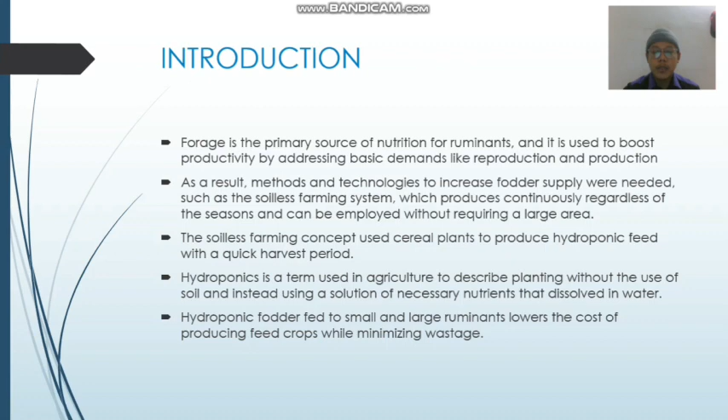Problem statement: the watering system for fodder in this project is used to enhance crop watering efficiency and make it easy for the user to control the crop's water schedule.

Referring to the conventional method, farmers or livestock breeders usually have difficulty monitoring the water cycle of their feeding crops. A farmer needs to ensure that the crops he grows always have a sufficient amount of water at the correct time of the day.

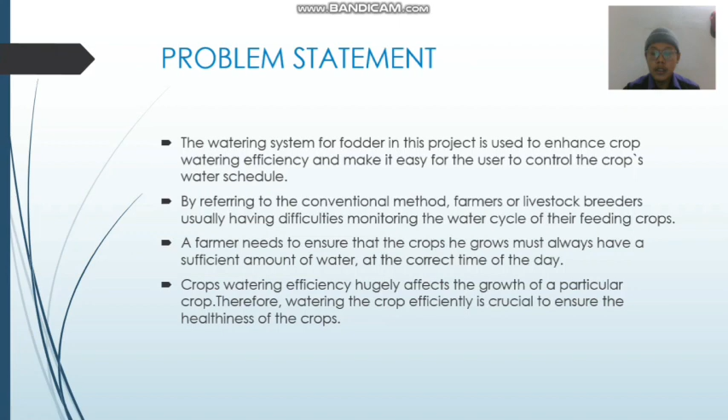Crop watering efficiency hugely affects the growth of a particular crop. Therefore, watering the crops efficiently is crucial to ensure the healthiness of the crops.

Research objectives: first, to improve the water monitoring system by using NodeMCU. Next, to enhance the water recirculation system quality and reduce water consumption.

Scope of research: designing the fodder system by considering all factors including the dimension of the fodder, the amount of grass produced by the fodder, and the time of grass growth. Estimation of water volume and time taken for the water to circulate the entire fodder system.

Choosing the suitable pump to circulate the water based on usage needed. Selection of microcontroller component required by the system. Designing an automatic water recirculation for the fodder system. Observation and analysis on the grass growth and time taken for the water flow.

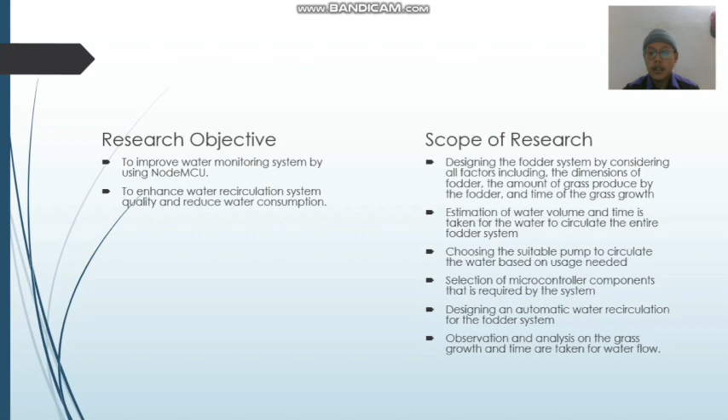Introduction of fodder: plants cultivated for animals are known as fodder crops. Fodder crops are divided into two categories, which are temporary and permanent. Permanent fodder crops are land that has been used for herbaceous forage crops for at least 5 years, whether cultivated or growing wild. A fodder system can feed a vast variety of livestock for milk and meat production.

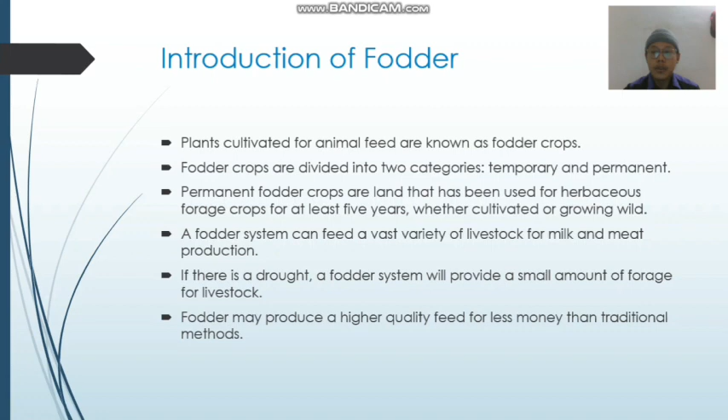If there is a drought, a fodder system will provide a small amount of forage for livestock. Fodder may produce high quality feed for less money than traditional methods.

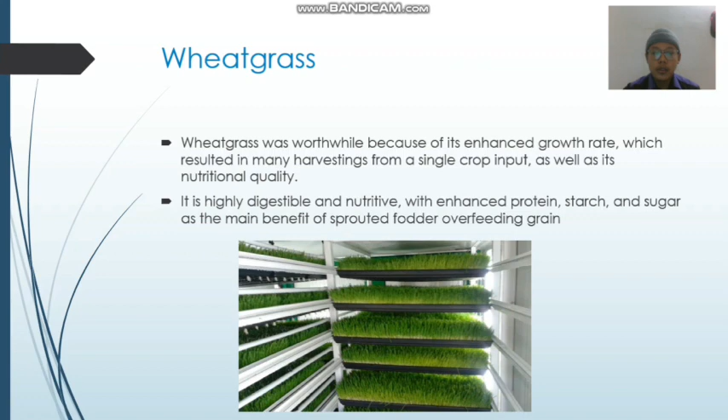Next, we explain about wheatgrass. Wheatgrass is worthwhile because of its enhanced growth rate, which results in many harvests from a single crop input, as well as its nutritional quality. It is highly digestible and nutritive with enhanced protein, starch and sugar as the main benefit of sprouted fodder over feeding grain.

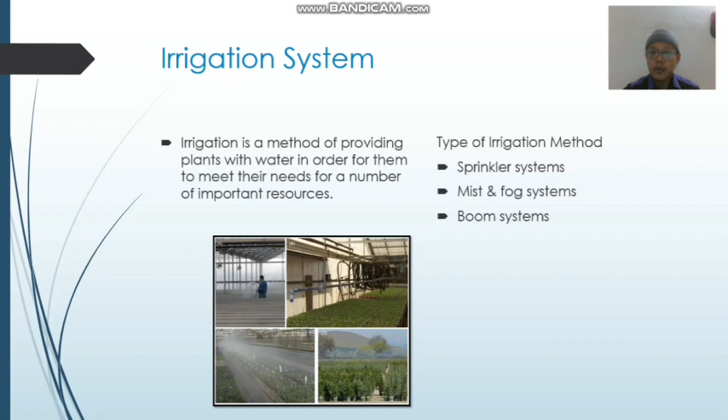Irrigation system: irrigation is a method of providing plants with water in order for them to meet their needs for a number of important resources. There are a few types of irrigation methods: the first one is the sprinkler system, next the mist and fog system, and the last one is the boom system.

Irrigation controlled by NodeMCU: the goal of this study is to create a low-cost hydroponic system that can keep the water level in the grow tray constant using a simple microcontroller control mechanism. Unlike a traditional hydroponic system, the pump does not need to run continually.

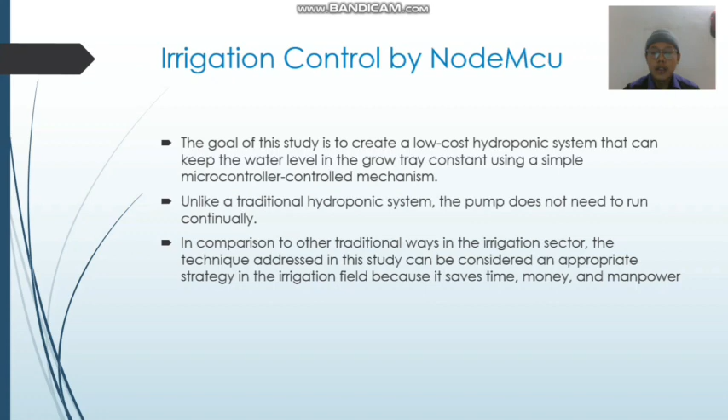In comparison to other traditional ways in the irrigation sector, the technique addressed in this study can be considered an appropriate strategy in the irrigation field because it saves time, money and manpower. Methodology: the goal of this project is to use a NodeMCU to maximize the use of water in the irrigation system process, as well as to construct an ecologically friendly feed system.

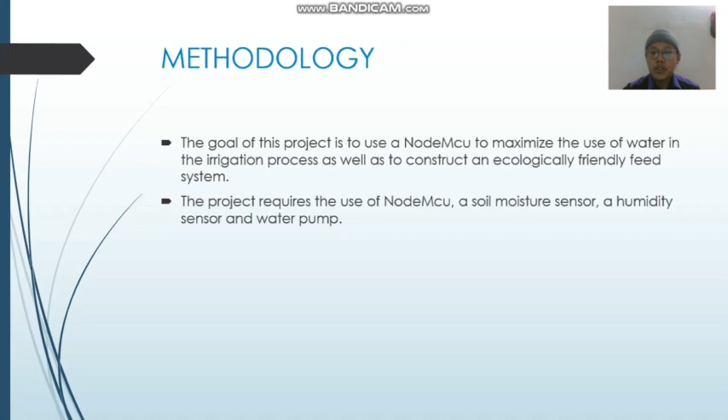The project required to use a NodeMCU, a soil moisture sensor and humidity sensor, and a water pump.

This is the flowchart of the project. First we start, then we identify the problem. After that, we develop the research objective. Next, we find the literature work that relates to the project. Next, we need to determine the parameters. After that, we design an irrigation system. After that, we test and analyze.

If the test and analysis does not meet the specification, we will try to design another concept again. If the test and analysis is proven, we move to discussion, documentation and report writing, and then that's all for the project.

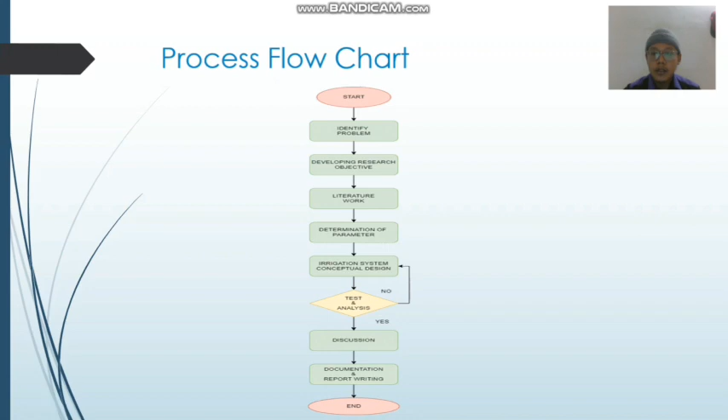Selection of controller. For the irrigation system, the selection of controller is crucial to ensure the working performance of the system is at its best.

An embedded system for program control of a water system is included in this suggested work. This project uses a remote sensor system to identify a water system design in real time. This design maintains a strategic distance from water wastage while providing a uniform and required level of water for the automation of the irrigation framework using IoT.

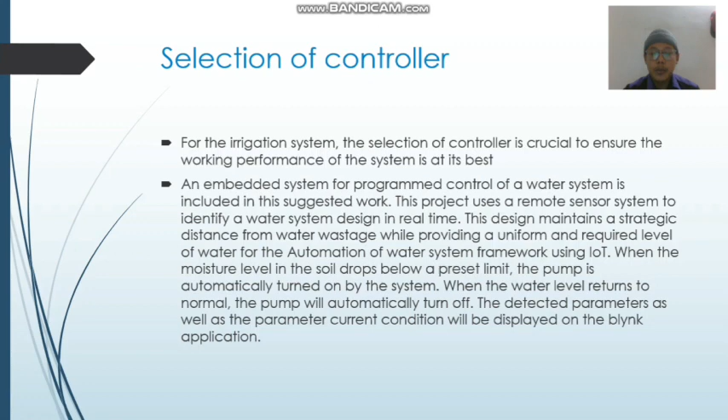When the moisture level in the soil drops below a preset limit, the pump is automatically turned on by the system, and when the water level returns to normal, the pump will automatically turn off based on the detected parameter. The current condition parameters will be displayed on the Blynk application.

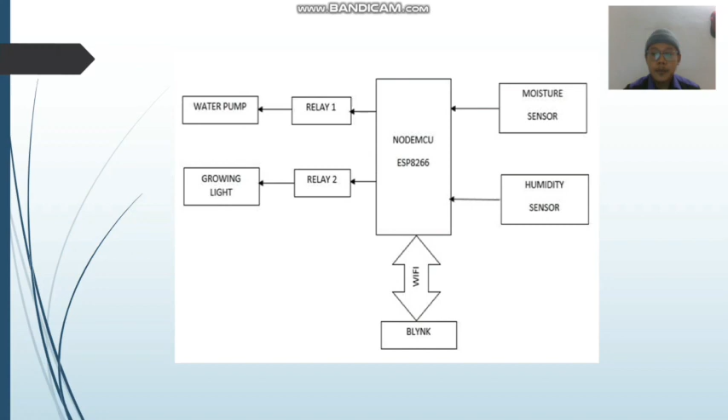This is the block diagram of the working principle, the NodeMCU working principle. The moisture and humidity sensor will send a signal to the NodeMCU, and then the NodeMCU will send another analog signal to the water pump and growing light. Then the user can monitor the process using the Blynk app.

Sensors. There are two sensors we use in this project. First, the soil moisture sensor measures the volumetric water content in soil. The sensor was utilized to detect the presence of moisture in the hydroponic plant in this project. The sensor will send a signal to the NodeMCU to switch on the water pump when it detects less moisture in the planting tray. The humidity sensor is the other sensor used in this experiment.

To reduce the frequency of watering, a temperature and humidity sensor is required. That is, as the weather gets cold, less water is required, and in the opposite case, more water is required.

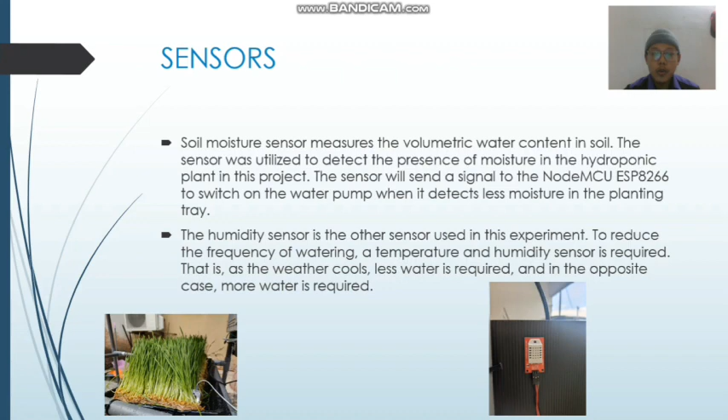On this project we will be using the Blynk app. Blynk is an IoT platform that allows users to build their own application to control and receive data from their project over the internet. When the NodeMCU has internet connection, it will display the data on the Blynk software, which allows users to track their hydroponic current condition.

This is the watering system layout. First, water will pump from the water reservoir and flow through the frame, as you can see in the diagram. Once the water reaches the top level of the frame, it will automatically recirculate into the reservoir tank due to the slope that we have there.

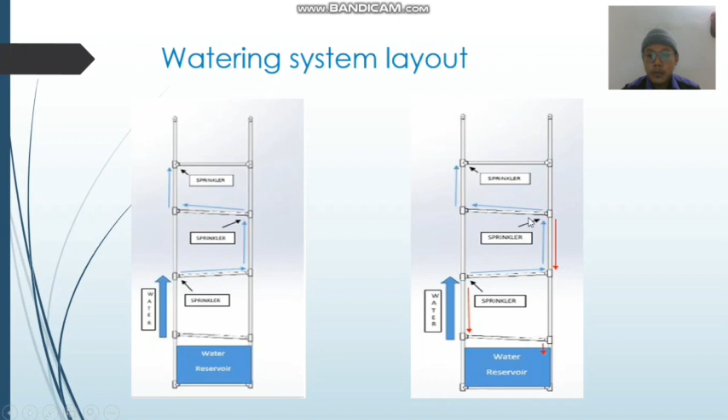So the water that drops from the sprinkler will drop into the tray and continue into the water reservoir.

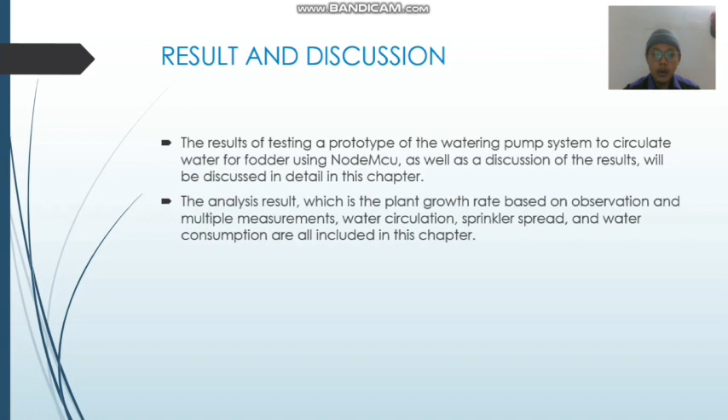Result and discussion. The result of testing a prototype of the watering pump system to circulate water for Fodder using NodeMCU, as well as a discussion of the result, will be discussed in detail in this chapter. The analysis result, which is the plant growth rate based on observation and multiple measurements of water circulation, sprinkler spread, and water consumption, are all included in this chapter.

Germinating process. First, the plant must go through the germination technique, in which seed is soaked with water for roughly 4 to 12 hours, and water is sprayed on the seed twice a day until the radicle is seen, before shifting the seed into the developing tray.

For this procedure, two sets of germination process have been conducted, which is the 4-hour and 12-hour immersion process, to compare the difference.

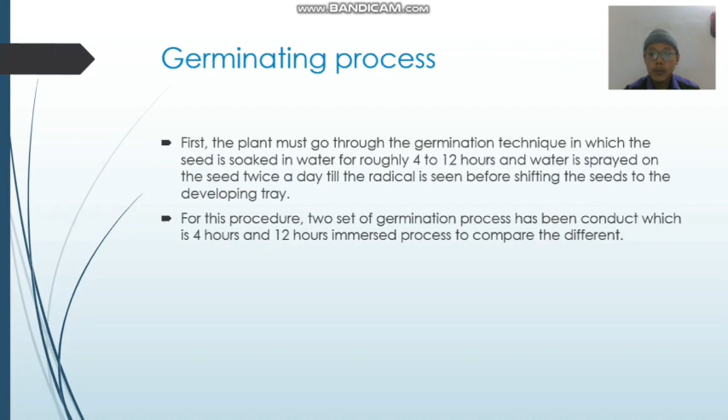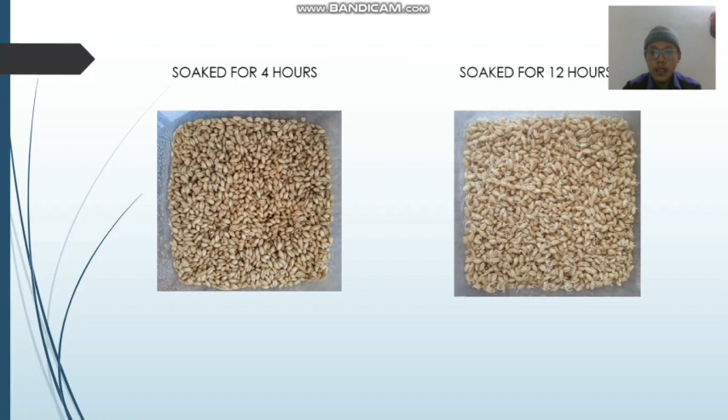This is the two trays of seed soaked for two different times. The first is soaked for 4 hours, and the second for 12 hours. Both seeds are shown on the second day of germination. As you can see, the seed soaked for 4 hours germinates slower than the seed soaked for 12 hours.

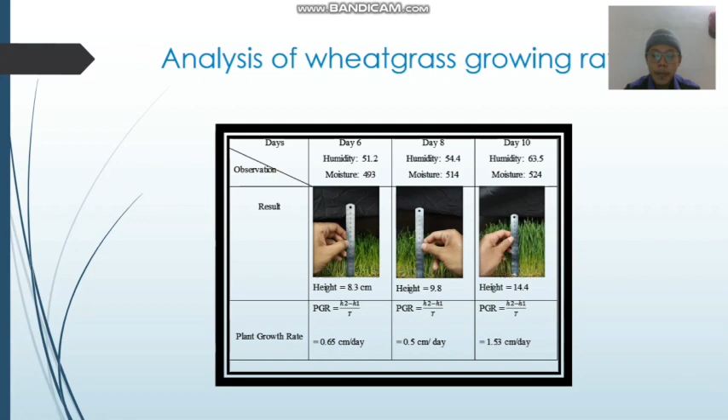We can also see the difference in humidity and moisture each day. The total plant growth rate for day 6 is 0.65 cm per day, for day 8 is 0.5 cm per day, and for day 10 is 1.53 cm per day.

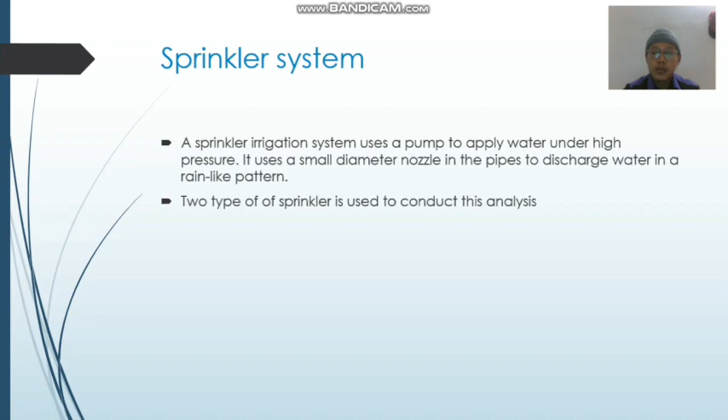Sprinkler system: a sprinkler irrigation system uses a pump to apply water under high pressure. It uses a small diameter nozzle in the pipe to discharge water in a rain-like pattern. There are 2 types of sprinklers used in this analysis.

The first is the fixed 360 sprinkler, and the second is the multi-stream sprinkler. The working pressure for both sprinklers is the same, 1.5 to 3 bar, but the nozzle diameter for the fixed 360 sprinkler is a little smaller than the multi-stream.

The spray radius is also different. The fixed 360 sprinkler has a 0.7 by 0.9 meter spray radius, while the multi-stream sprinkler can reach 0.8 by 1 meter. The connection size also differs: the fixed sprinkler is 3 mm and the multi-stream sprinkler is a bit bigger at 4 mm.

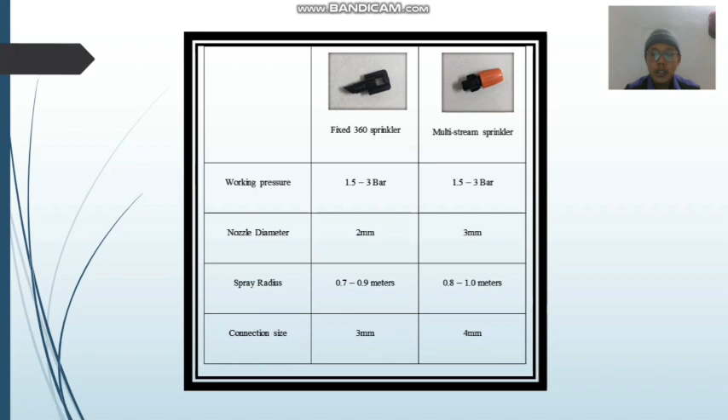The fixed 360 sprinkler has the ability to produce a very fine mist in a 360 degree direction. This output is suitable for fodder seed growing in the early phase. However, the 360 mist is not adjustable — it is fixed to give out mist around 360 degrees.

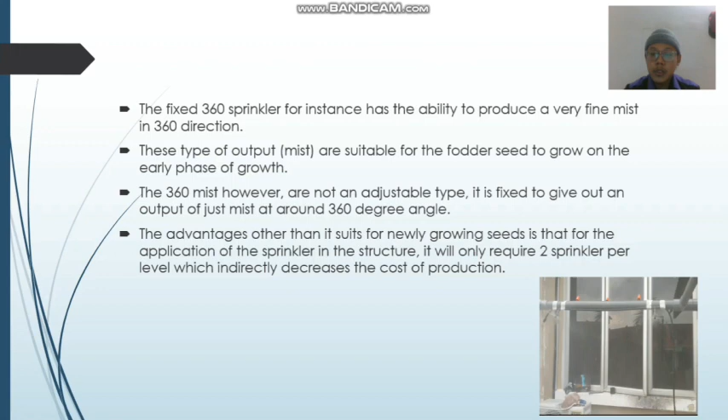Besides being suited for newly growing seed, another advantage is that applying this sprinkler in the structure only requires 2 sprinklers per level, which indirectly decreases the cost of production.

The actuator of the multi-stream sprinkler can control the spray radius according to certain conditions required by the user. Its bold advantage is that it can be set up not only for misting but also adjusted to drip water.

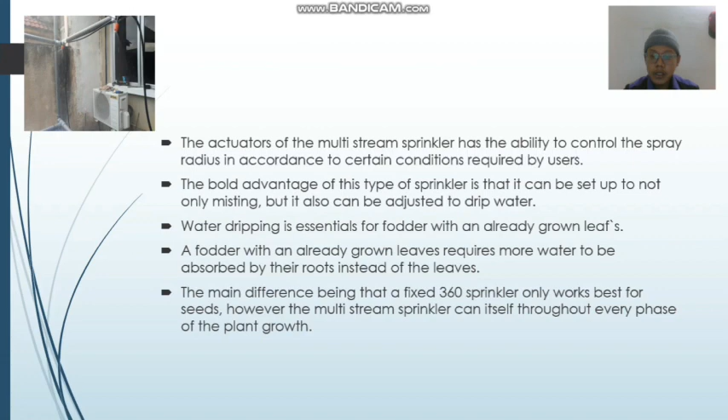Water dripping is essential for fodder with already grown leaves, since it requires more water to be absorbed by the root instead of the leaf. The main difference is that the fixed 360 sprinkler only works best for seeds, while the multi-stream sprinkler can serve every phase of plant growth.

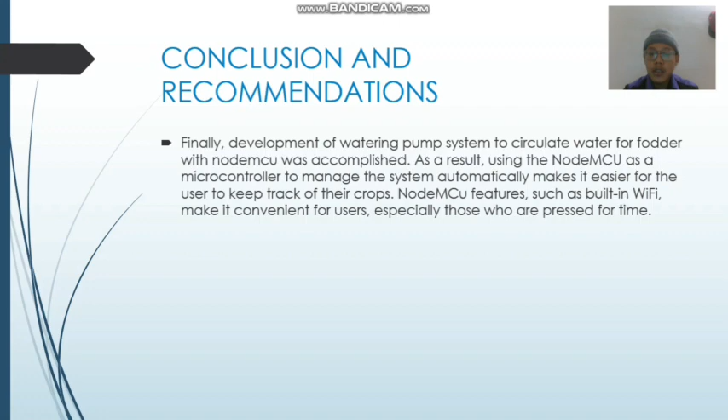Conclusion: the development of a water pump system to circulate water for fodder using NodeMCU was accomplished. Using NodeMCU as a microcontroller to manage the system automatically makes it easier for users to keep track of their crops. NodeMCU features such as built-in Wi-Fi make it convenient, especially for those pressed for time.

This is the recommendation for the project. First, adding a nutrient mixture into the reservoir tank to increase the quality and growing rate of the fodder. Next, using a GSM module to allow remote control and adding a notification system to alert the user of the status. The last one is adding a filtration system to the water pump to increase water quality and keep the pump from breaking.